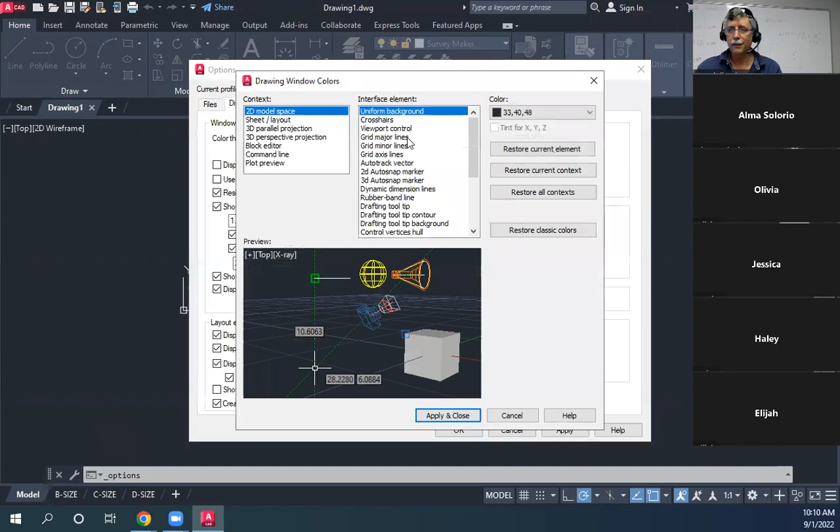And then, you know me, I like to have a light background. You just got to do this all the time - doesn't take too long, you'll get good at it. And then I think I have too many bars down here, I don't have all the bars I want. Oh look at that, I can put it over there. So I'll make it so that I can adjust all these ones that you see here.

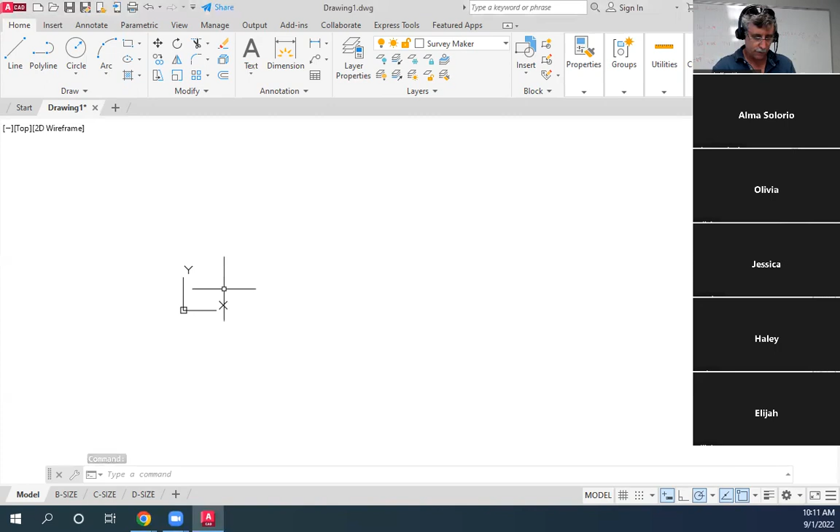And then the other thing I'm going to do, I'm going to make sure that my units for my line weights and lines are in inches. Did I start the recording? Yes, good. And there's one other thing I'm going to do - I'm going to go to my units, and I'm going to make sure I'm in decimal feet, because that's what it said everything is in. I'm in decimal feet.

Now, the last thing is you need to know AutoCAD likes to draw angles going counterclockwise - that's what it likes. These machines, angles go clockwise. So if I want to read this data and draw it, I have to click this clockwise button that's in my drawing units, then my angles will go the right way. I hope they were the right way when somebody developed these numbers.

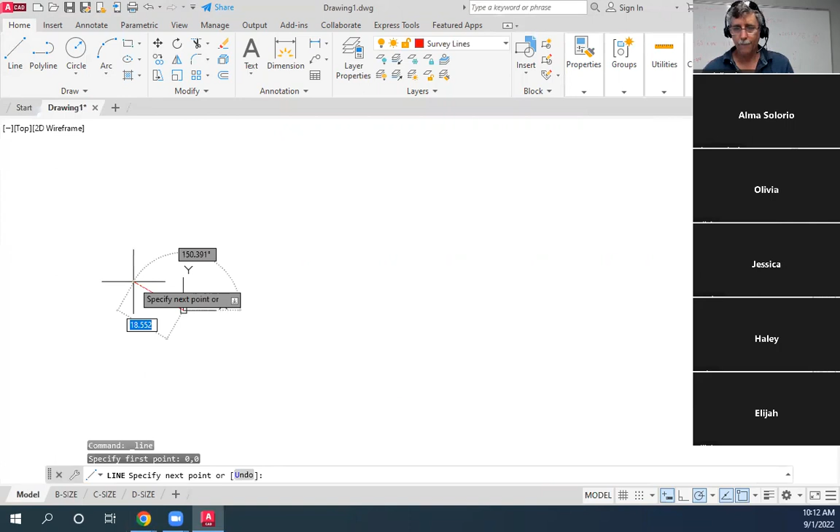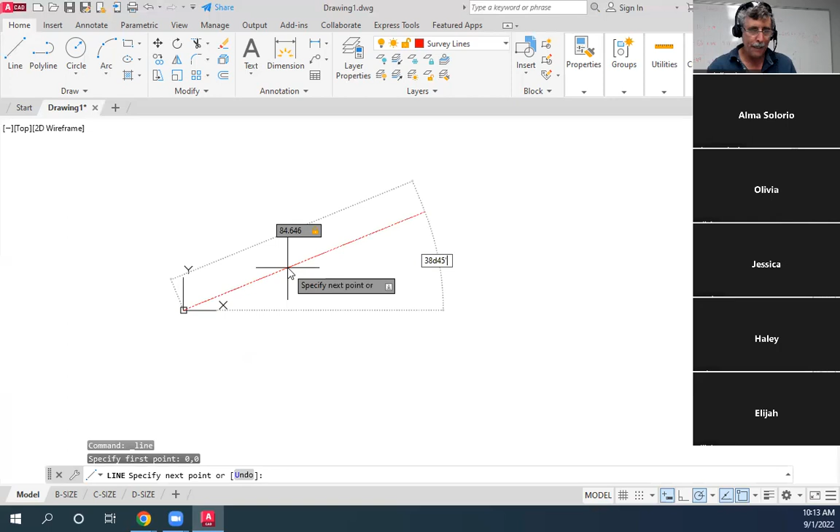So let's see if I can draw one. Here we are, I'm going to do distance at an angle, and I'm starting from 0,0 again. Start from 0,0, and it's going clockwise - that's good. How long? 84.646, and I just type it in. And then I do tab, and it's asking for an angle, and I'm going to type it in exactly like I see there: 38 degrees, 45 minutes, 56 seconds. There's my first point.

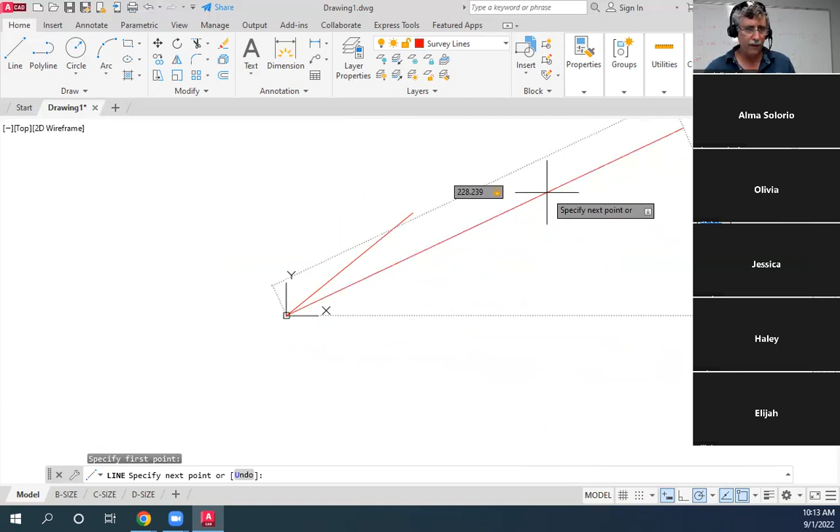Now my next one starts at 0,0, and it goes 228.239. Tab gets me off in my direction. Notice I've got my dynamic on - if that's not on, the inputs are a little bit different than what you're seeing. But 13 degrees, 25 minutes, 39 seconds.

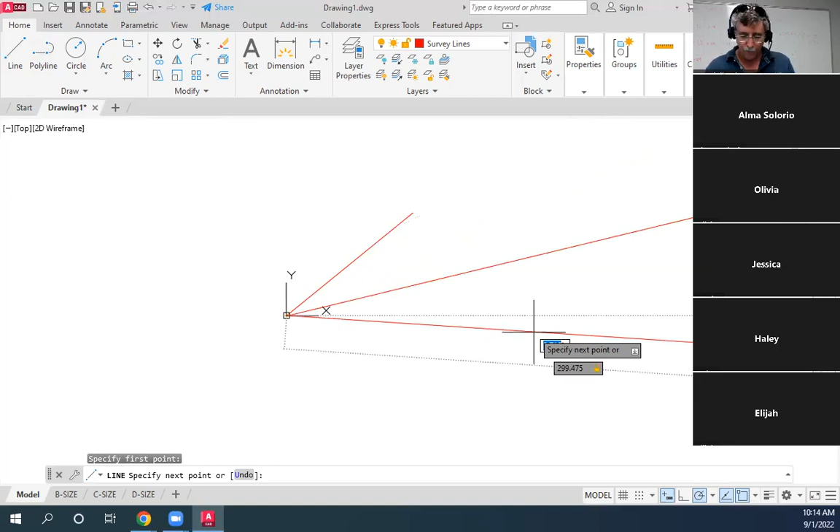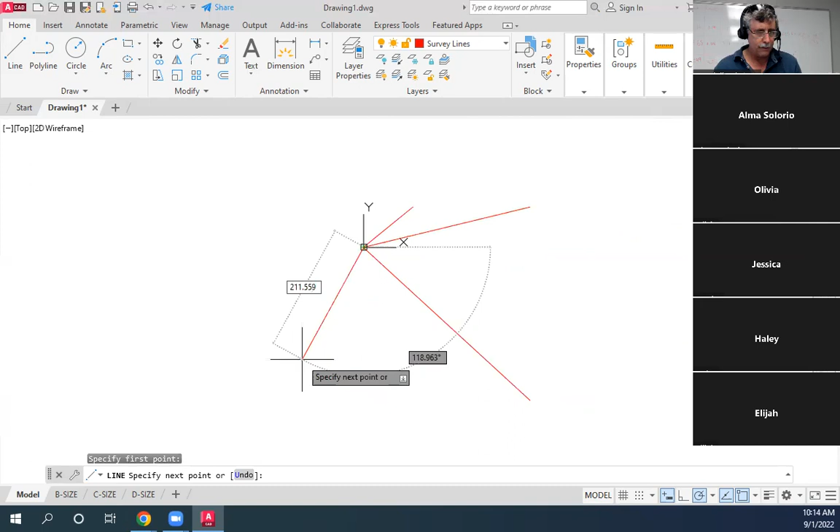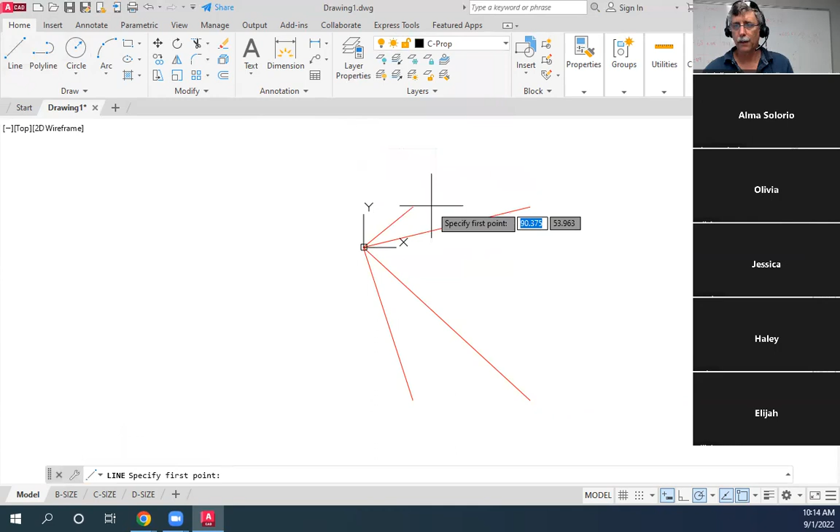Minutes are an apostrophe, seconds are quotes. So that's kind of, and there we go, I've got it.

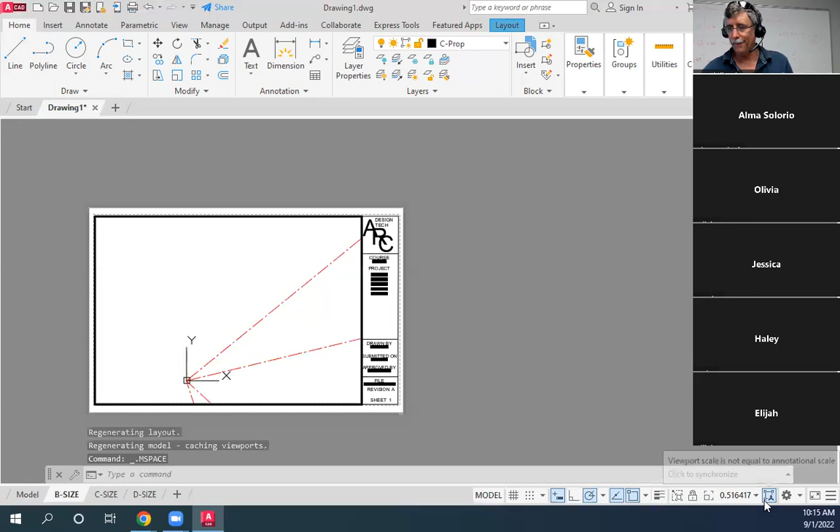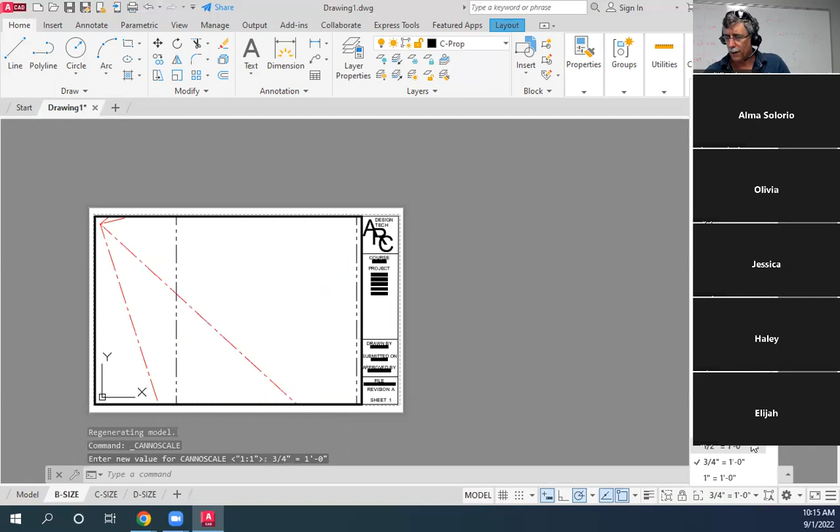Go to my B-size template, all the same stuff. I need to get this at a normal-ish one. Got to go one more. There we go. And that would do it. Okie doke. So that's how you draw with those.

Well, no, it's according to your reference. Okay, we haven't set the reference yet. I'll show you how to do that.

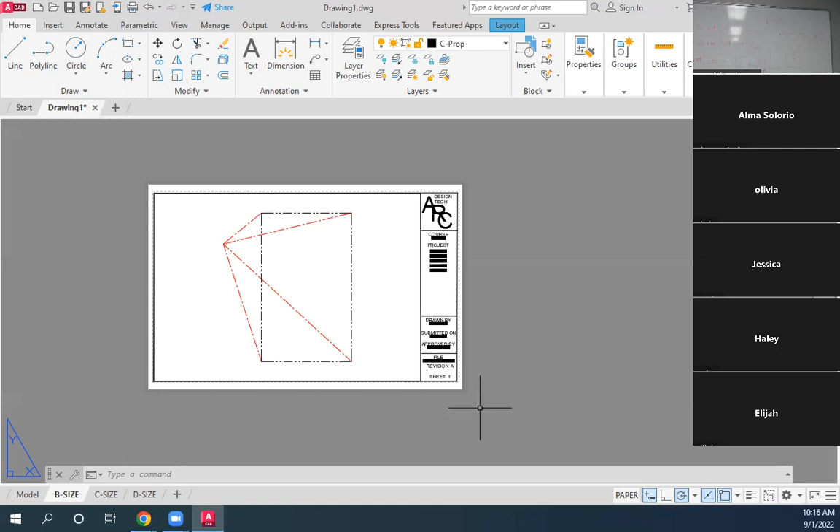Azimuth angle is your angle in the horizontal plane. If you want to choose north as your reference, then it's from north. If you choose to, now don't get too hung up, you're missing the point. Azimuth is the angle in the horizontal plane. So the question is, what is the azimuth? Azimuth is the angle in the horizontal plane.

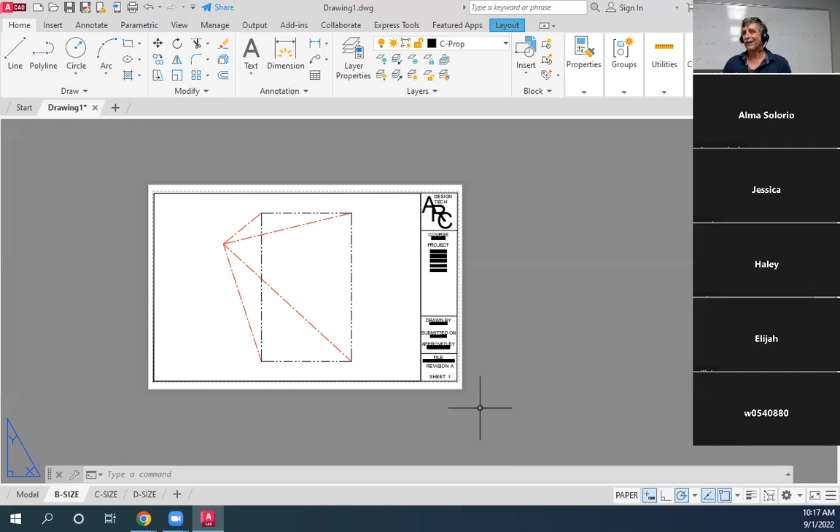Now, where do you choose to count zero from? You can count from north, you can count from south. You can set up two points and say that's my line that gives me zero. So don't get too hung up on little picky things that are actually only meaningful if you're working with those picky things. Okay, so it's hard, right? Because we always talk, oh, north is this way, north is that way. You'll have to find out, we'll get to that.

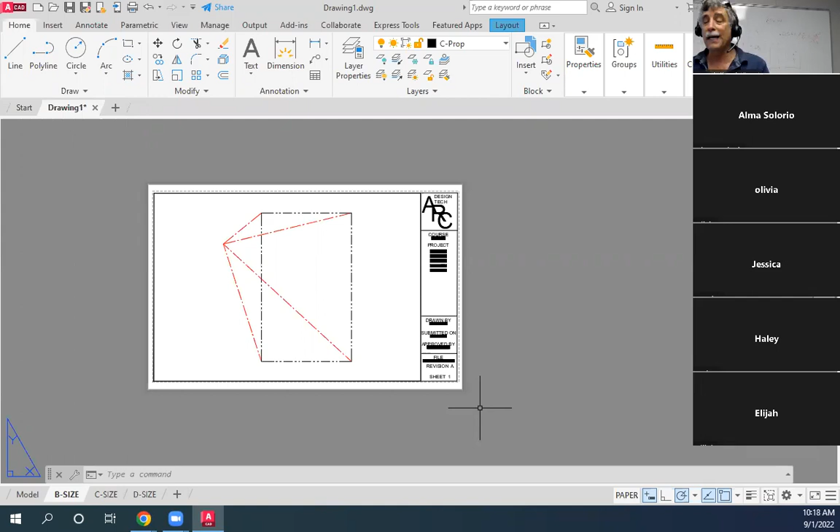But right now, where is zero on AutoCAD? East. Yeah, zero degrees is east, or horizontal X to the right. So we haven't set where it is in the real world yet, so we're going to get it as east, horizontal X to the right, or east. So let's see what that looks like.

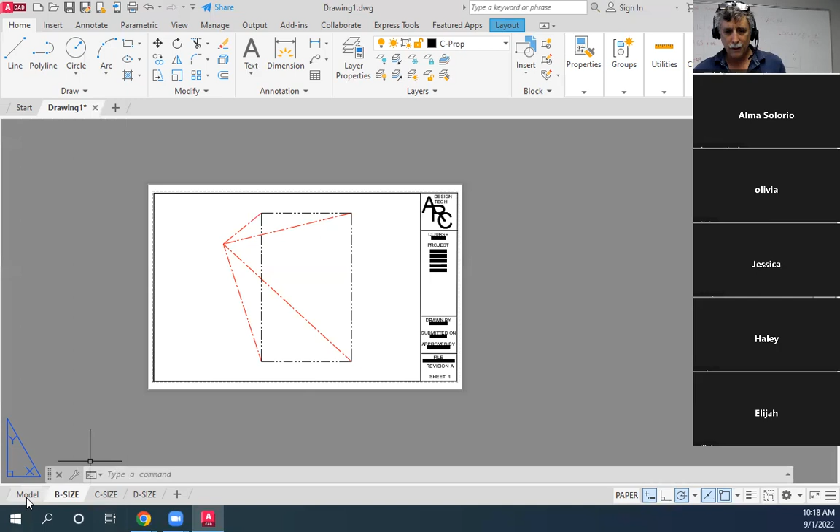That's a good question. See up here? See that east marker? When you go to the, when you see your nav cube, that's the standard AutoCAD setup. Now your survey may not use that. That's where we're going to teach you how to align things, but that's in week 4, right? Right now we're just going to take AutoCAD and go, let me punch in these numbers and it'll be fine.

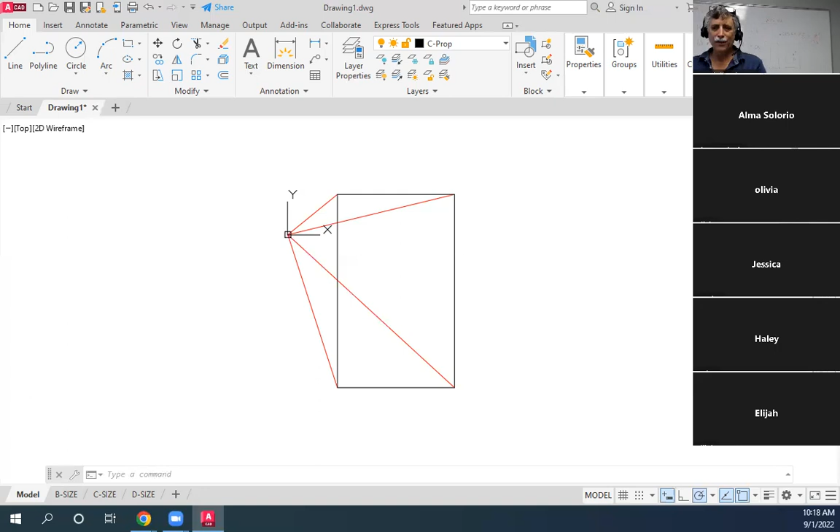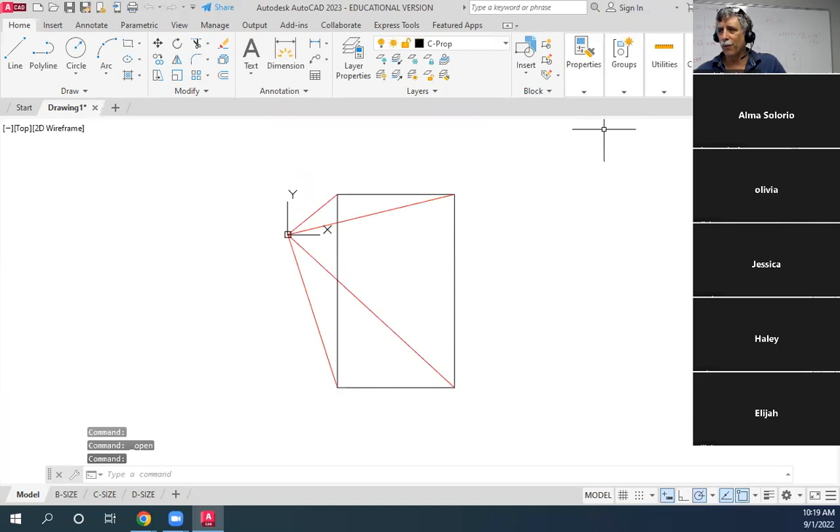Okay, all right, so there you go. That's what you're going to do, and there's six of them to do, right? If I go open a new one and go find that. Oh, good question, where do I find the template? There it is right there. Resources page.

Really? Is my, oh, don't tell me that when they redid our computers, they emptied it out again. That would be a bummer. Nope, there it is. Instructor files, design 350.

So when you find me, design 350. And there's the civil template. Phew.

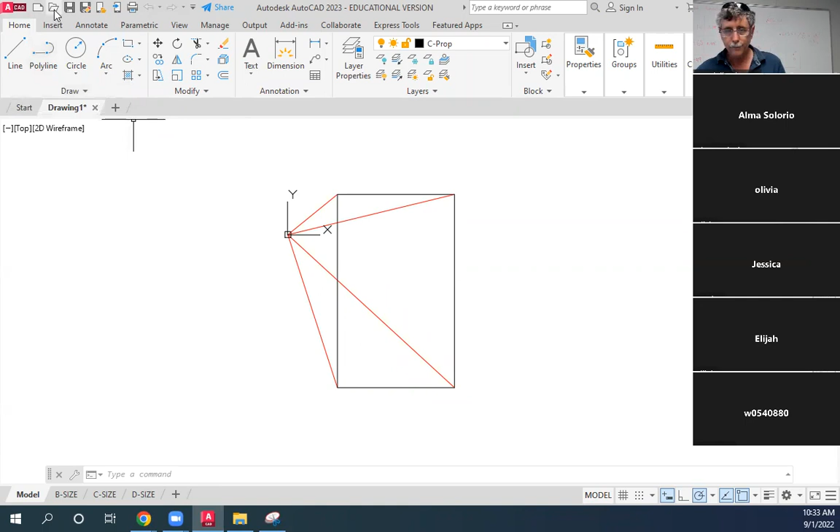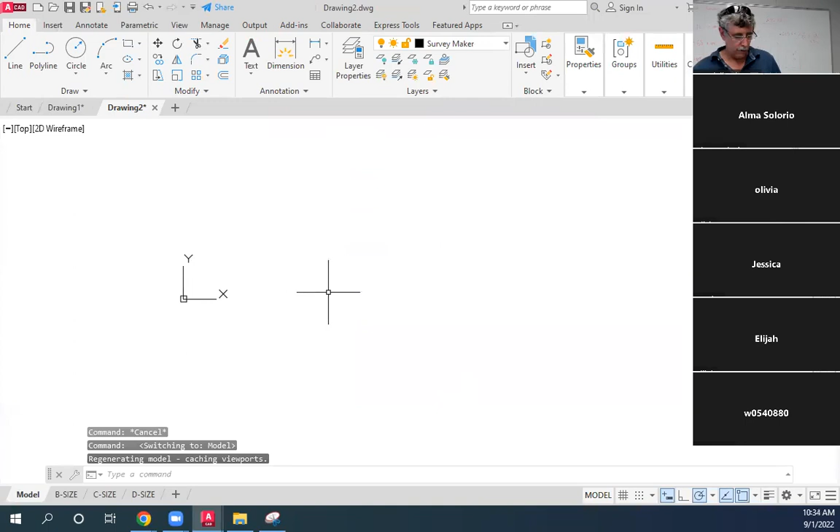So let me start a new one. That's new, browse templates, go find my template again. Go back to my model space and I'll just do a right click, paste from clipboard. There, got it.

And literally now I'm going to trace, but there's a few things I like to do. I'll click on the image, right click, go to properties, and I like to change the transparency, maybe 70% transparent. And see how now I can really trace over it.

And I'll do these on C-Prop, and I'll make it just regular lines. Now I don't need to be too careful or too close. See, I'm just kind of getting something - it's just a real quick visual.

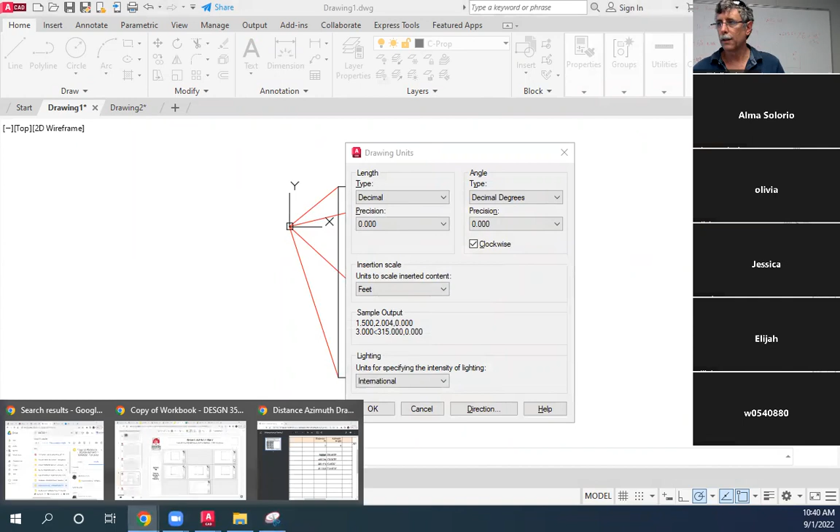That didn't work. Okay, so it allows you to do just a little bit more as you work on it. Okay, so, or you can leave them blank and maybe put some explanatory text there, or even just leave them blank.

And bearings aren't the same as azimuth, so you can change that. And did I ever give you an update so that you can do 1.6?